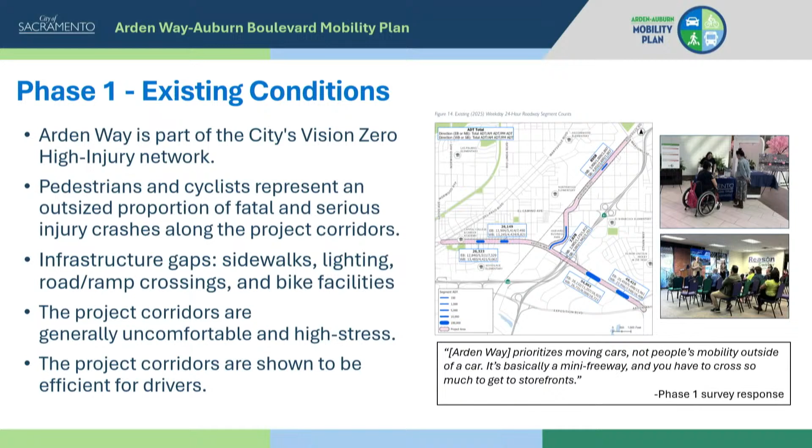In our phase 1, we brought these existing conditions to the community and received robust feedback, generally aligning with what we saw through our engineering analysis. Phase 1 survey response here: Arden Way prioritizes moving cars, not people's mobility outside of a car. It's basically a mini freeway, and you have to cross so much to get to storefronts.

So in phase 2, we were looking at how we can intervene to shift these conditions. We assessed a range of different opportunities and developed 3 concepts. We're currently evaluating those concepts so that later we can mix and match the elements that work, are feasible, and are preferred by the community to develop a draft alternative improvement.

So the range of opportunities considered include one-way separated bikeways, two-way separated bikeways. These would need to be supported by roadway capacity reduction or road diet. We also looked at concepts that do not include road diet and instead rely on something like a multi-use path.

I'm not going to describe all of the concepts in great detail here for the interest of time. However, they are described in detail in the staff report, and there are figures in the attachments to the staff report if you would like to see diagrams. Generally, though, we have 3 concepts for Arden Way, representing that range of opportunities that I described, and 2 concepts for Harvard Street and Auburn Boulevard.

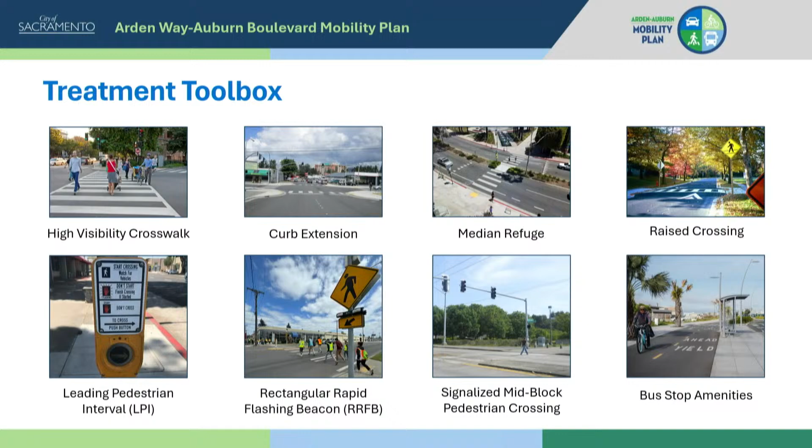In addition to those continuous major infrastructure changes, we also developed a treatment toolbox. This treatment toolbox can be mixed and matched with any concept and applied at various locations along the study corridor. It includes crosswalk improvements for visibility to slow or stop traffic, median refuge so that folks have a safe space, also a variety of signal changes, bus stop amenities, lighting improvements, landscaping, accessibility improvements, and traffic signal enhancements.

So we took these concepts and that treatment toolbox to the community. We hosted 2 focus group meetings, a community workshop, which we promoted pretty robustly. We did direct outreach, flyers, social media, door hangers, and mailers. The project team distributed the door hangers ourselves, which was beneficial and enjoyable. You can see in the photo here.

We also conducted outreach to several neighborhood associations, including Woodlake, Ben Ali, Del Paso Heights, and Hagginwood. And we spoke at the D2 Presidents Association meeting, presidents of all neighborhood associations in D2. We hosted 5 pop-up events at 3 light rail stations, the Celebrate Old North Sacramento Festival, and a mobile farmers market, which has just started up at the corner of Arden and Del Paso.

And then we had a virtual workshop on the Konveio platform that ran for a month. It's closing at the end of the day tomorrow. This virtual workshop allows you to pop in, review the boards from our community workshop, and add comments anywhere on the board. So far, we've received over 120 comments.

So we're still synthesizing everything that we've heard from the community, as well as what we'll hear from you tonight. But this is a snapshot of what we've heard so far. We've heard a lot of support for crosswalk improvements, for widening sidewalks, for closing those sidewalk gaps, and for improving lighting, especially under the freeway interchange.

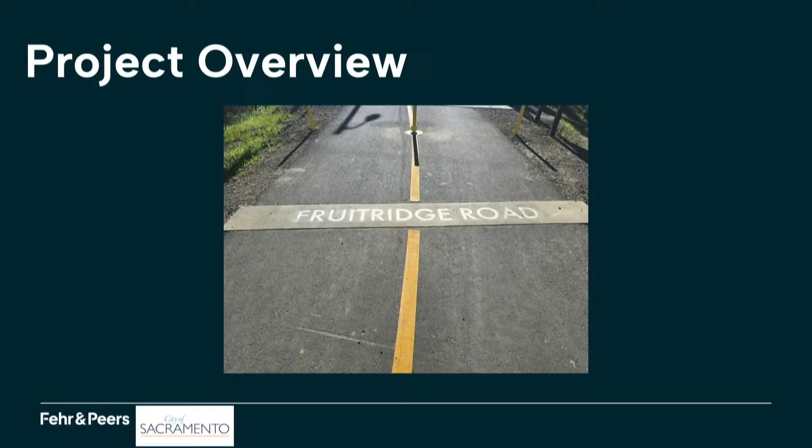The plan is a planning effort aimed at enhancing mobility, safety, and access for all roadway users. The planning area is a 4-mile stretch of Fruitridge Road from Riverside Boulevard to Stockton Boulevard. The corridor was previously identified as part of the city's high injury network, and the current Vision Zero update has identified it as a top 10 priority corridor. You'll hear more about the Vision Zero updates during the next item on your agenda this evening.

Phase 1 community engagement included both a focus group and general community workshop. Some of the recurring themes we heard were that all modes of travel felt unsafe to one degree or another, but with particular emphasis for those walking and biking. Folks shared that accessing public transit and other community services can be particularly challenging, and safe routes to school was also a particular concern, with over 12 schools on or near the corridor. There are also concerns around vehicle congestion challenges, especially turning onto the corridor from side streets.

Based on the feedback we heard during Phase 1, we've gathered input and developed a set of design alternatives, which we will then share for additional feedback from the community.

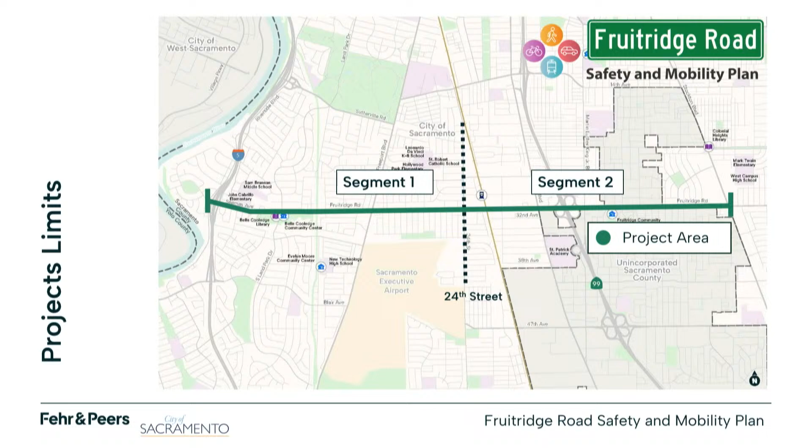For the purpose of this discussion, the project area has been divided into 2 segments, with segment 1 on the west running from Riverside Boulevard to 24th, and segment 2 running from 24th to Stockton Boulevard. Existing conditions on the corridor generally include 4 lanes of vehicle traffic with 2 in each direction. What we've called the half diet scenario includes a reduction in vehicle travel lanes from 4 down to 2 in the western segment of the corridor, as was previously approved in the city's 2040 general plan. What we've called the full diet scenario includes a reduction from 4 to 2 vehicle travel lanes for the entirety of the corridor.

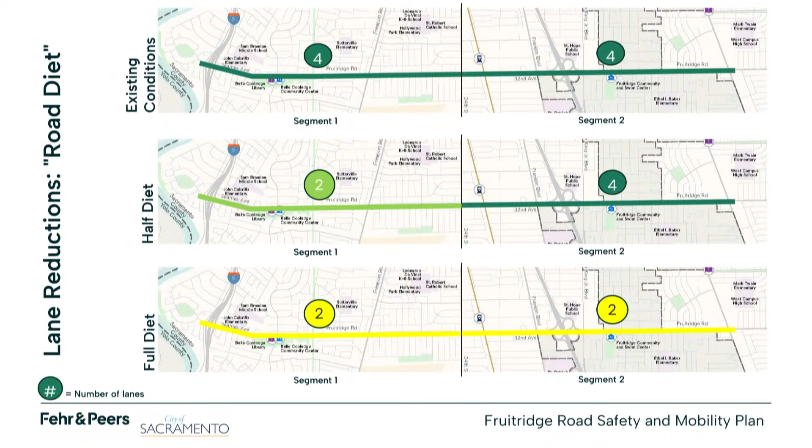I'll now invite Adrian to talk through the traffic forecasting results for each scenario and some more design specifics.

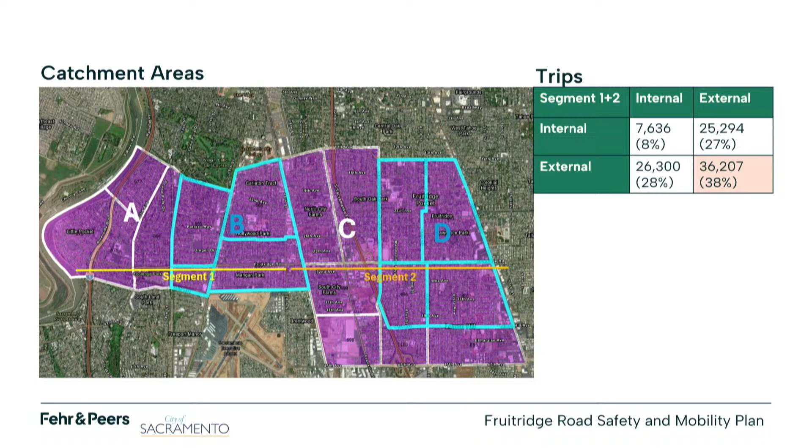First, we want to understand a little bit about the traffic behavior along the corridor. We identified the purple area shown on the map as the catchment area for Fruitridge Road, and tried to identify how much of the traffic was using it for daily needs within that area versus traveling through and around. We found that about 38% of the traffic on Fruitridge Road was not starting or stopping their trip within that purple area, so it was primarily cut-through traffic accessing one of the freeways or traveling through to get from one end to the other. So we do think there's some room to consider the road diet as part of this, and we'll talk a little bit more about those specifics.

We've looked at the scenario in 3 different ways. We'll first talk about the 2040 general plan condition. We wanted to quickly evaluate what the future growth was on the corridor to make sure there wasn't future need that was unanticipated.

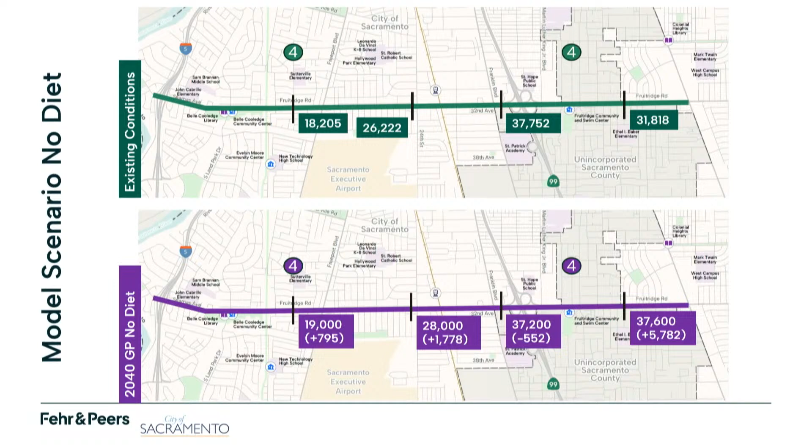We don't anticipate a higher need for traffic along this corridor. In the half-road diet scenario, which was approved in the general plan, again looking at the forecast volumes and comparing those to today's volumes, we see a slight reduction in volumes on the western half and mixed results on the east, but generally similar volumes that are out there today based on the capacity of the roadway with 2 lanes on the west and 4 lanes on the east.

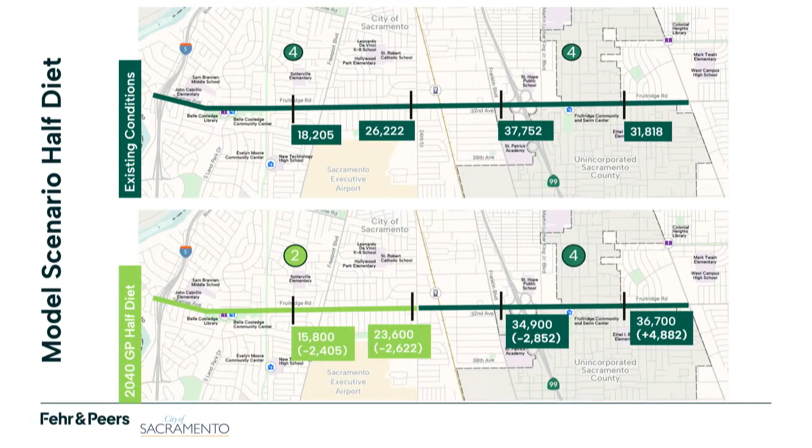And then finally we looked at the full road diet scenario. We started seeing a little bit more squeeze of the traffic, especially on the eastern half, where we start seeing reductions in the magnitude of somewhere between 5 and 19,000 cars per day, unable to use Fruitridge Road due to the capacity decrease, especially around the 99 interchange. So seeing some reduction there.

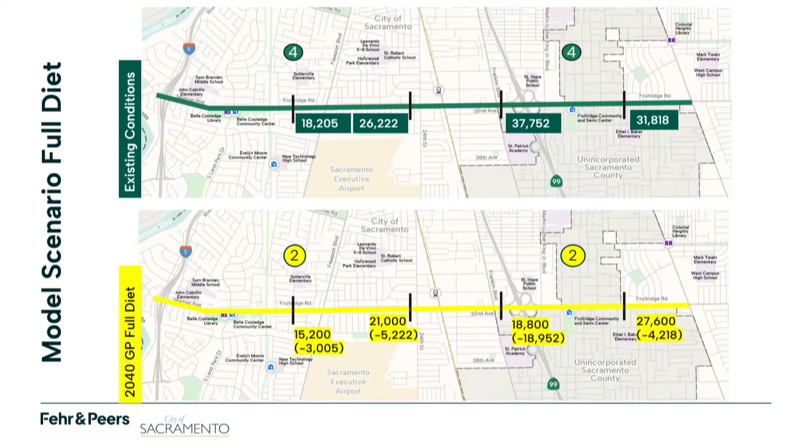With these volumes, here they are compared together, really trying to think about what that means. But really it begs the question of where does that traffic go and where are the trade-offs needed for the community as part of this project.

So we looked at the half diet scenario here. Blue lines based on color show volume reductions, where orange lines show volume increases. The width of the lines shows order of magnitude. As you can see on this map, the western half of Fruitridge Road has about a 15% reduction as previously discussed, and minimal changes on the eastern half.

We see a lot of that reduction increase on I-5, on that western edge, and more traffic using the 43rd Avenue interchange off of I-5 to access some of those destinations where they may be using Fruitridge today. So a little bit of a shift there, but generally a pretty minimal effect on the surrounding community related to the half-road diet.

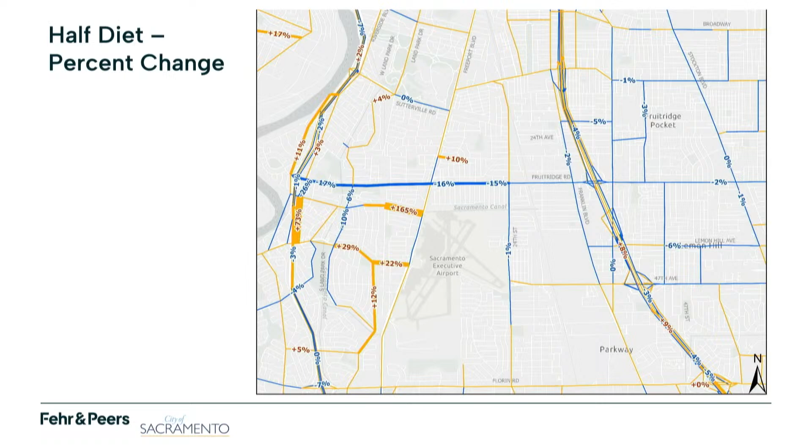As we look at the full road diet, we see a little bit more impact, especially near the 99 interchange. That decrease in volume is shifting traffic onto the interchanges north and south on 99 Fruitridge. So we're seeing an increase in Sutterville, 24th Avenue, and Fruitridge to the north, and an increase to the south at 47th Avenue and Lemon Hill and those neighborhoods as well, splitting that traffic depending on whether their destinations are north or south of Fruitridge.

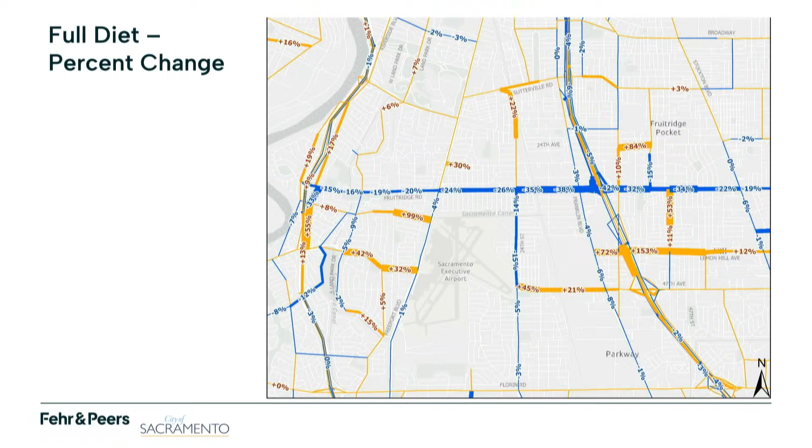Again, we wanted to really evaluate the road diet as part of the project early on to understand how much opportunity there is for roadway improvements. Here they are side by side.

With that, we were looking for roadway design alternatives. So with that change in traffic, what can we achieve? We're looking at 3 particular alternatives that are themes we'll be bringing to the public next month. All of them are focused on improving traffic safety and outcomes for all roadway users, improving light rail access to the Fruitridge Light Rail Station, as well as the transit stops along the corridor.

All 3 alternatives are adding separated bikeways per the Streets for People plan with some different configurations that I'll talk about in a minute. And really trying to improve some access and multimodal connections through both the interchange at I-5 and 99 with some ramp modifications and other safety improvements there.

Alternative 1 is a bike forward, or sort of base level, design. Alternative 2 we're calling our PED forward, or enhanced, design that really looks at enhancing the pedestrian environment in addition to the bike environment. And then alternative 3 looks at a half road diet and what that would take to only do the lane reduction on the western half.

As was mentioned, the corridor is over 4 miles long, so we have a number of different conditions along the corridor. The western half is a 4-lane with attached sidewalks, relatively narrow right-of-way. Through the middle portion of the roadway, we have a number of frontage roads, giving us opportunities to utilize parts of that space to create enhancements. On the eastern half of the project, between 24th Street and Stockton Boulevard, we have a 5-lane road segment with some opportunities for improvements as well.

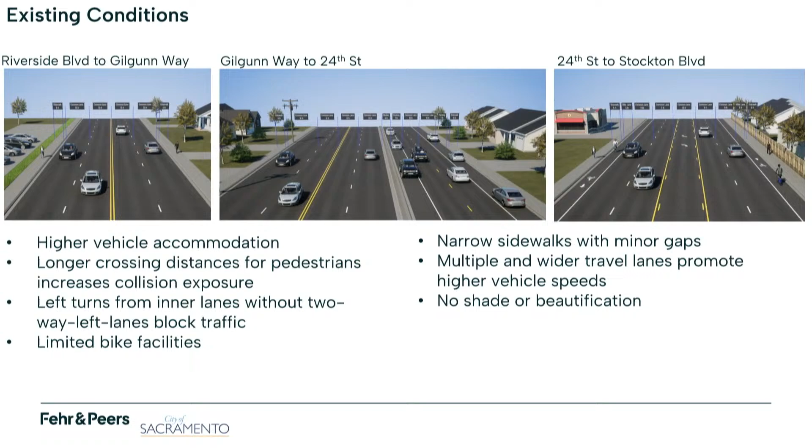So with those 3 alternatives, alternative 1 was looking at a full road diet. We're reducing the number of travel lanes along the entire corridor, maintaining a 2-way left turn lane in the middle for fire access and to achieve access on and off the corridor, along with a separated bikeway. With this, we're maintaining existing curb and gutter and developing a more low-cost bikeway implementation.

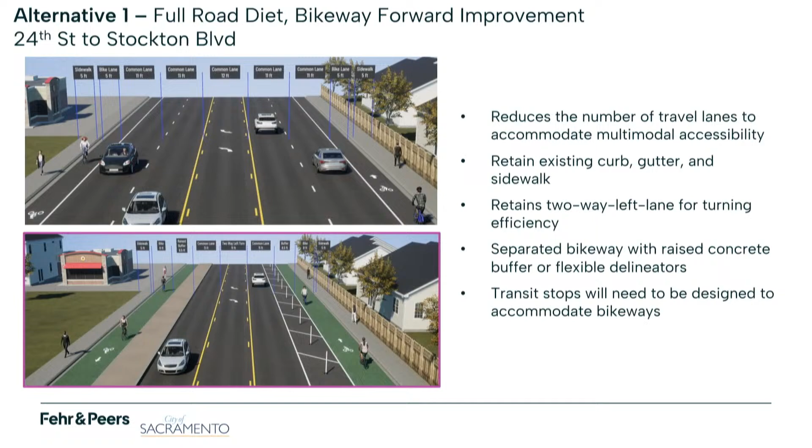For alternative 2, similar roadway configurations, but proposing to reconstruct the entire curb, gutter, and sidewalk and raise the bikeway up to sidewalk grade. This also gives us opportunity for additional planting along the eastern 2/3 of the corridor and some additional enhancements there.

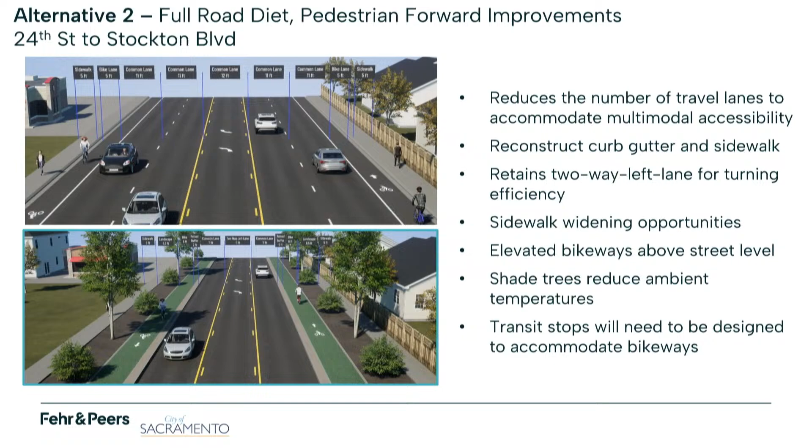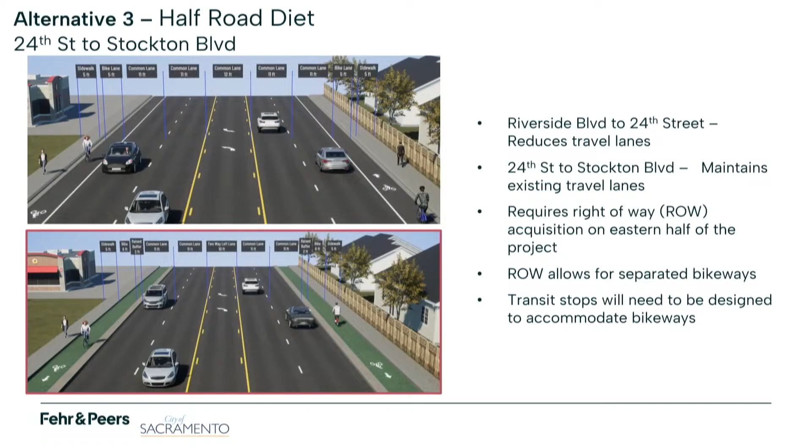And then finally, the road diet scenario with the half road diet on the eastern half has similar bikeway conditions with a separated bikeway, but this may require some right-of-way or improvement behind the back of walk within the existing right-of-way in the space that's there. So a little bit more expensive for a little bit less improvement, but able to maintain those 4 lanes. So with that, happy to answer questions.

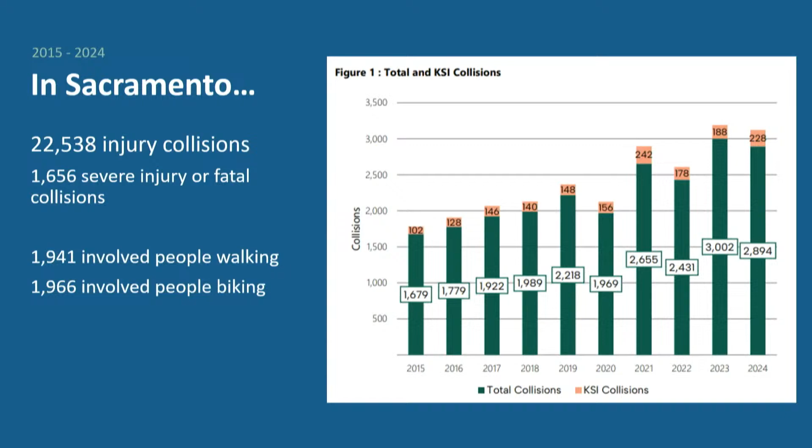Through our data analysis, unsurprisingly, there are a number of key factors: driving at unsafe speeds. If we can reduce speeds, crashes may still happen, but they're survivable crashes, and ultimately that's our goal. People not following the rules of the road is another big factor we're looking at. And then impaired driving—everyone please drive sober so that we can all reach the destinations we are going to.

So as I mentioned, in January and February we came to you, talked about the high injury network, brought you the draft actions, and we were on a road show. We did a lot of community engagement. We hosted workshops, worked with our task force, but we also went to our communities in their neighborhoods and at their events, because that's where you get the richest engagement.

We also engaged youth. That was a big part of the work we did, and it was super fun. We worked with the Improve Your Tomorrow organization and talked to a lot of high school students about their neighborhoods and their needs.

Ultimately, as part of this engagement process, we wanted to know: how should we develop the high injury network? And you told us, and we went to council, and they gave us a blessing. I'll talk about that a bit more, but we ended with council on March 17th, where they gave us direction on how to do the network.

So the high injury network. Traditionally, the high injury network is a set of streets within the city with the highest frequency and severity of crashes. It's pretty self-explanatory. In the past, we only used crash data to evaluate how we develop our high injury network. However, new state law allows us to consider two other factors.

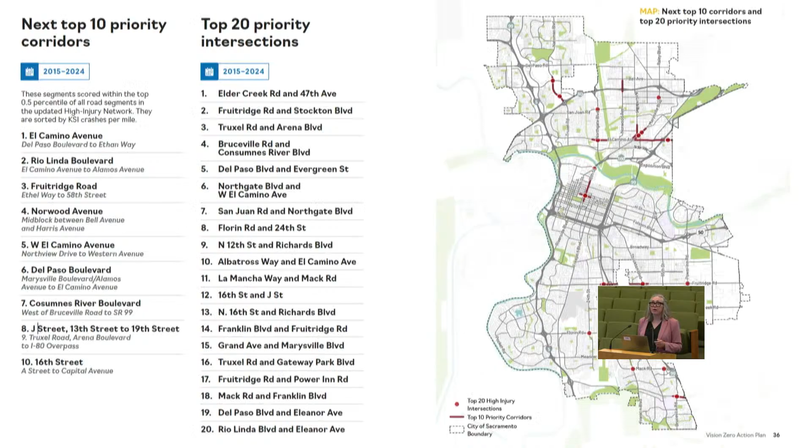When we came to you in February, you said use it all. We said great—the communities really said the same thing as well. We went to council in March, and they said yes, use all these conditions. So when we were developing the high injury network, that is what we considered.

I know this is a lot. This breaks all the rules of a PowerPoint presentation slide of what you should and should not include.

But we wanted to show you the breadth and depth of the work and analysis that we have done. So we have a new high injury network that includes all the things we talked about, severity and frequency of crashes, considerations for vulnerable road users and sensitive areas.

Coming out of that, we have a new top 10 corridors. We had our Vision Zero top 10 corridors in 2018, which we've made significant progress on, and now we have the new top 10. Those include El Camino, Rio Linda, Fruitridge, Norwood, West El Camino, Del Paso, CRB, J Street, and apologies, there's a little typo in the graphic, number 9 is Truxel, can't see that there but it's there.

We also heard loud and clear from you and many members in the community that we shouldn't just focus on corridors, that we should focus on intersections. So we identified the top 20 intersections in the city for severe and fatal crashes, which are listed here. It's a lot, I'm not going to read them off, but you can see them here, and they're also illustrated on the map. What might be unsurprising to many of you is that the majority of these are in our under-resourced and disadvantaged communities.

So we took that, and that's so you heard your input. We had the draft map, and we are going to be asking folks what they think about it.